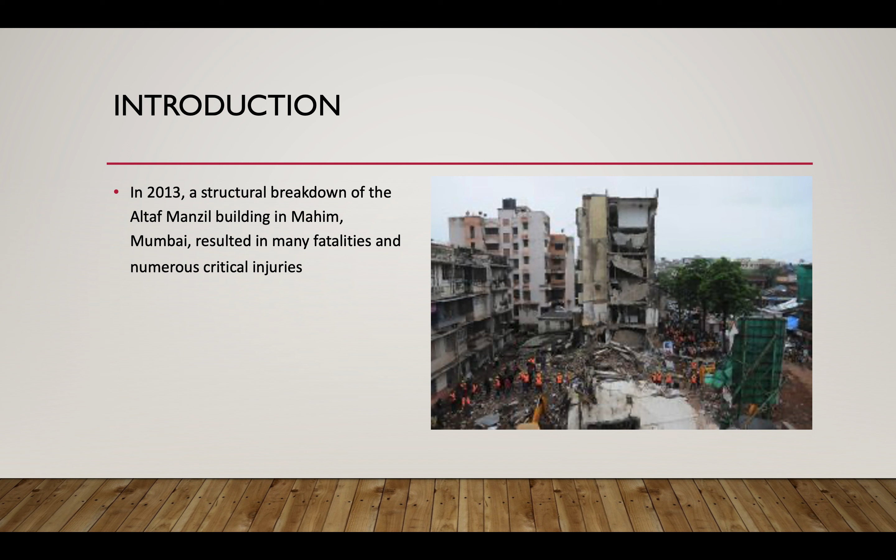Okay. Collapse of the Altaf Manzil building. In 2013, a structural breakdown of the Altaf Manzil building in Mahim, Mumbai, resulted in many fatalities and numerous critical injuries. The building was 4 stories tall, with apartments for residents on the upper stories and shop space on the ground level. The collapse happened during the monsoon season in Mumbai, which is characterized by strong winds and a lot of rainfall. This study examines the reasons behind the failure, names the accountable parties, and makes recommendations on how to stop it from happening again.

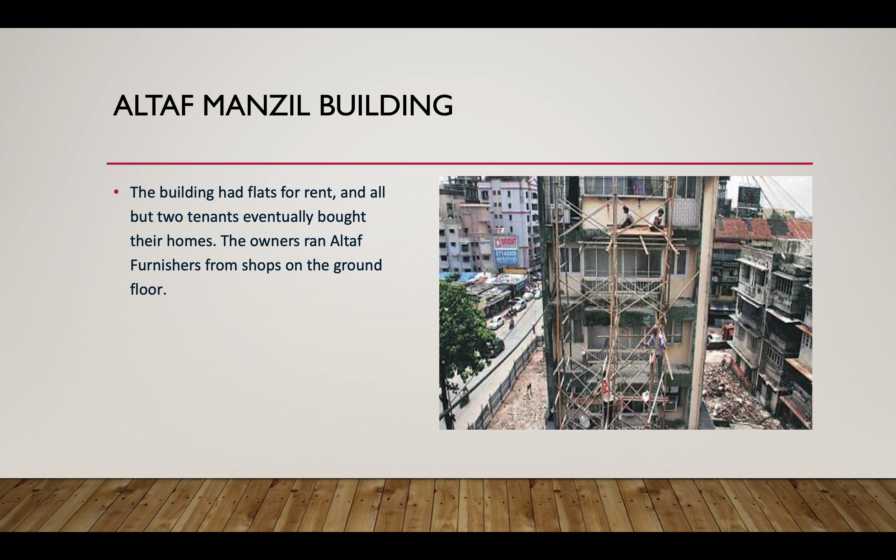The Altaf Manzil building was a 4 story building in Mumbai, India. It was built in 1982 and 1984 by Altaf Furniturewala. The building had flats for rent, and all but 2 tenants eventually bought their homes. The owners ran Altaf Furnishers from the bottom shops on the ground floor.

The structure was exposed to a variety of loads, such as seismic, wind, and gravity stresses. The weight of the building, the people that lived there, and their belongings were all considered gravity burdens. The structure was surrounded by high winds that created wind loads. Mumbai's proneness to earthquakes caused seismic loads as well.

It's important to note and talk about the monsoon season in Mumbai. The monsoon season is a significant annual event, typically lasting from June to September, where it experiences heavy rainfall during this period, with the southwest monsoon winds bringing in abundant moisture from the Arabian Sea. The city's infrastructure, especially the drainage system, can get overwhelmed during this time, leading to waterlogging and flooding in low-lying areas, and presents loads on the building, something that must be taken into account before any type of calculations for the building.

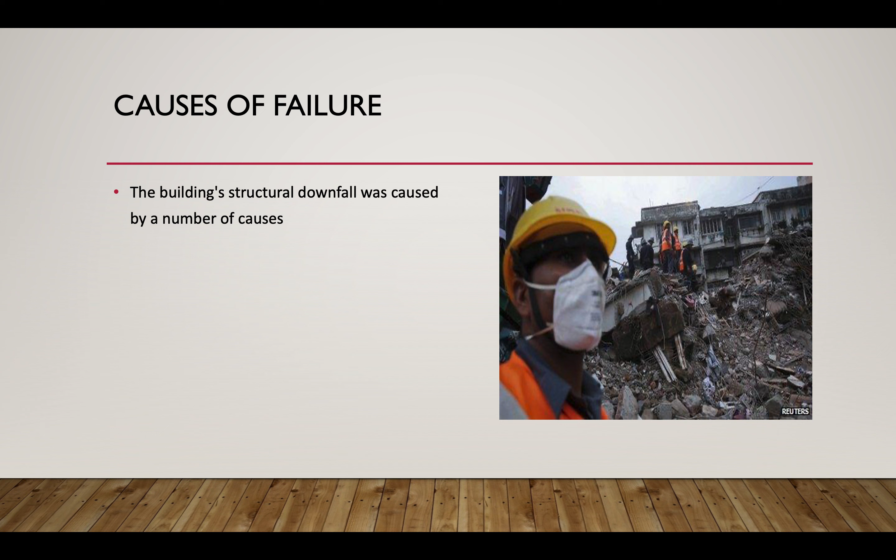A number of actions must be made in order to stop such a failure from happening again. First and foremost, it is necessary to guarantee appropriate building quality and procedure, regular maintenance, and compliance with safety rules and laws. It is important to provide enough supervision and inspection throughout the building process to guarantee adherence to safety and design specifications. Frequent structural component testing and inspection may help identify potential problems and implement remedial measures before they become serious. Campaigns to educate the public about the dangers of poor building quality and overcrowding in the building are also crucial.

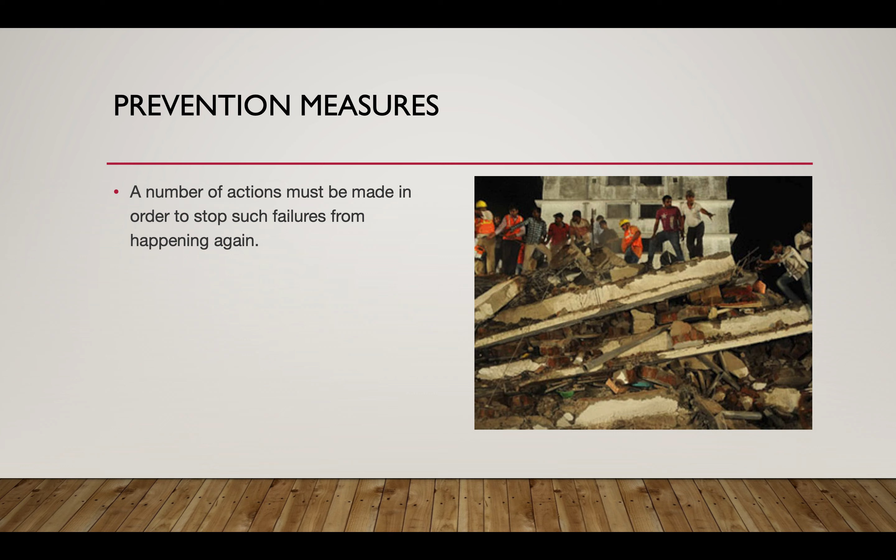It's important to note also the problem of building overcrowding in an area like Mumbai. In order to lessen the strain on already existing buildings, the government should endeavor to create space and reasonably priced housing choices. Tighter construction rules and regulations have to be implemented, and make sure they're being obeyed. Supervision and monitoring ought to be offered as well.

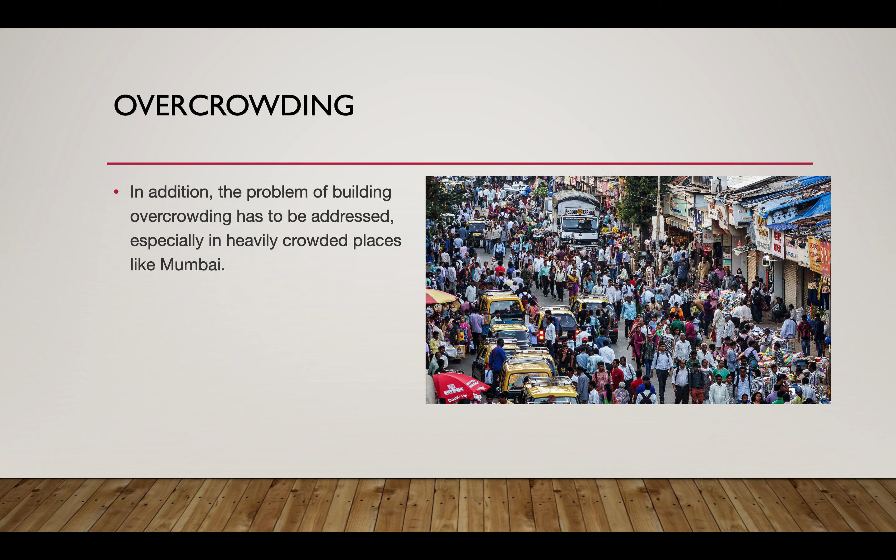Today, 18 months after its collapse, resulting in the death of 10 residents, Altaf Manzil in Mahim is said to be redeveloped, with a Bandra-based company recently bagging the deal. Pending permissions, the group intends to construct a 10-story building with bigger houses than before.

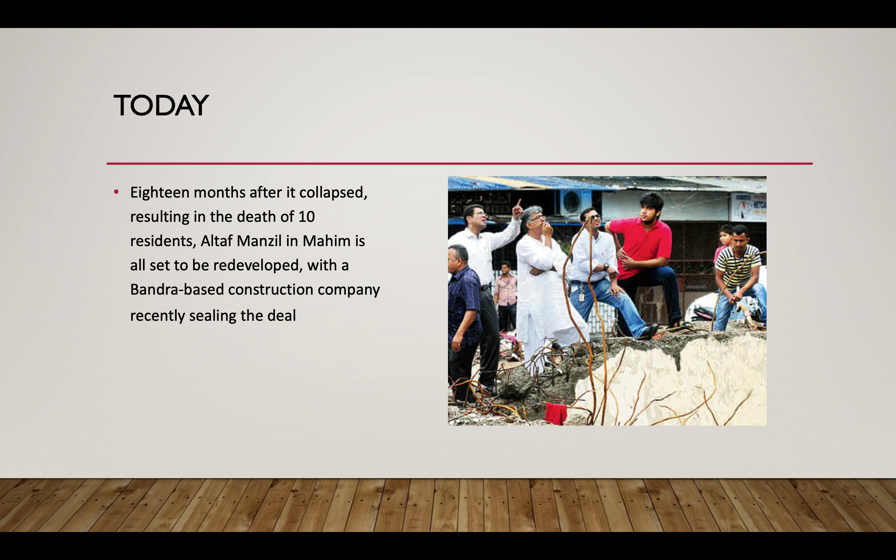In conclusion, there was a tragedy associated with the structural breakdown of the Altaf Manzil building in Mumbai that may have been avoided. To prevent such failures in the future, proper construction quality and methods, regular maintenance, and adherence to safety norms and legislation, while addressing the problem of overpopulation, are crucial. It is imperative that the government take appropriate measures to guarantee building safety and prevent similar tragedies in the future, and that the architects, engineers, and builders be held responsible for their acts.